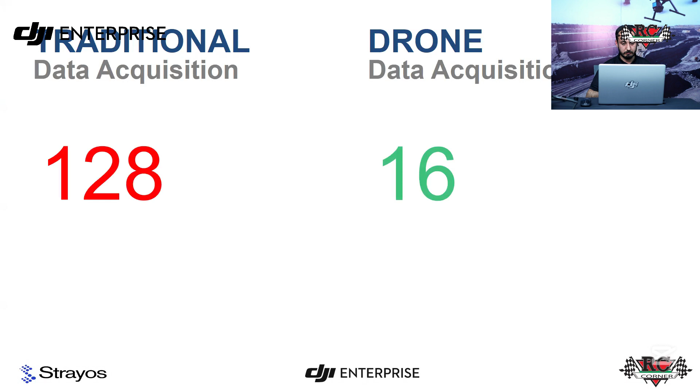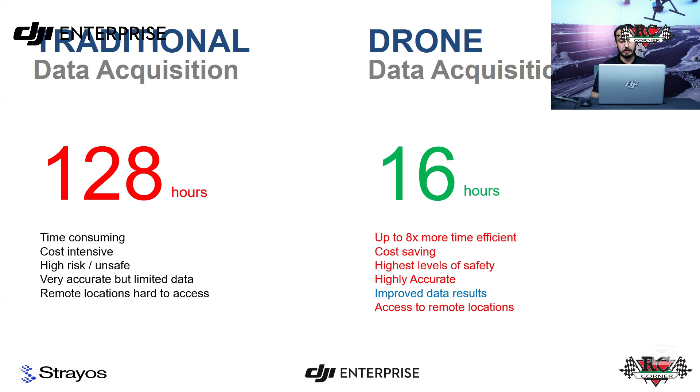As we see here, the future of work and the key benefits of switching from the traditional way to drones we have put into 4 parameters. First, it improves the efficiency of the work. How does it improve the efficiency? We can see it here. Traditionally, if we work on a construction site collecting data using a total station or DGPS devices, switching to drones will boost the efficiency by 8 times. If the traditional way takes 128 hours, with the drone the data acquisition will only take 16 hours. So efficiency increases by 8 times.

The second thing is the reduction of cost. Definitely, if the time is reduced and efficiency is enhanced, the cost will also be reduced, especially regarding timing and manpower. The third thing is enhanced safety.

Normally, if you are from the construction or mining industry, you have seen that taking a single coordinate point at the top of a hill or tough terrain is very difficult, going there with a prism rod or a total station or DGPS rover. The drone will automatically go to the site, capture the data of the whole terrain, and give you points even by centimeter, where each point is a centimeter apart from the other. It's up to you how much resolution and how much GSD, ground sampling distance, you want.

And the fourth thing is powerful insights. The powerful insight is regarding the data you get. This data is either the digital surface model, terrain model, 3D models, contours, 2D maps, orthomosaic, like that. So you can get it in a very sharp way.

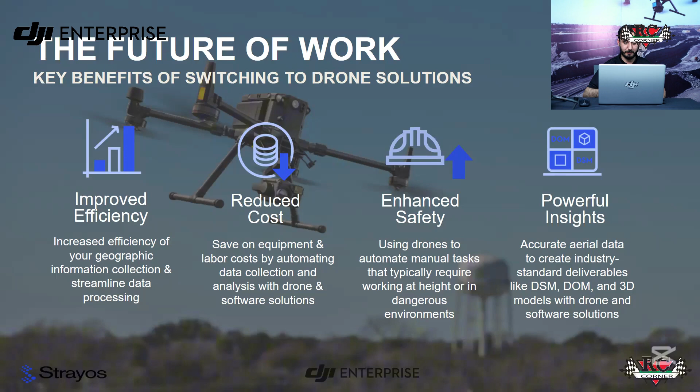So this we have discussed. The comparison of the traditional way and the drone has been explained in these 4 parameters, but another thing is the accuracy of the data. The data is much more accurate. It gives you 2 to 3 centimeter accuracy, and you can achieve more accuracy if you are using RTK processing.

Also, the data is very rich and detailed. It gives you a quick overview for planning. Whether you are designing terrains or doing urban planning, it will help you out.

What type of data can you capture and which deliverables can you make? Regarding drone photogrammetry, you can get contours and ground points, where each coordinate x, y, z will be apart from the other point by 1, 2, or 3 centimeters. This GSD, ground sampling distance, you can control. It depends on the flight parameters and the sensor you are using on the drone.

You can also generate the 2D orthomosaic map. This gives you quite good resolution compared to satellite imagery. And this imagery is geo-referenced, meaning it can be used as survey data.

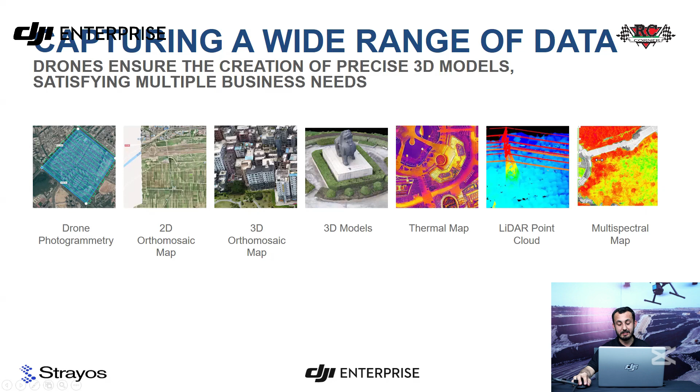This multispectral map gives you an understanding of plant indexes, like vegetation index monitoring, which plant is healthy or unhealthy, and gives you soil type data, whether this soil is compatible with this type of vegetation plantation or not. And also you can do plant counting.

So how does this start? If we go from the traditional way of mine exploration, before we were using staff rods, then we switched to total stations, then to DGPS devices, then to laser scanners, and then we switched to drones.

Because in the mining sector, specifically for open pit mines, sometimes it's a very small site and sometimes it's a very big site. So it becomes very difficult to access every step, to measure things, to measure the haul road, to do some analysis.

So this way, not only a single drone which captures imagery, but a drone with Strayos, as Strayos has integration with AI, gives you much sharper detail in a much more efficient way. Everything is cloud based. So it can save your time, it can save your cost, and it can also enhance the safety of the site.

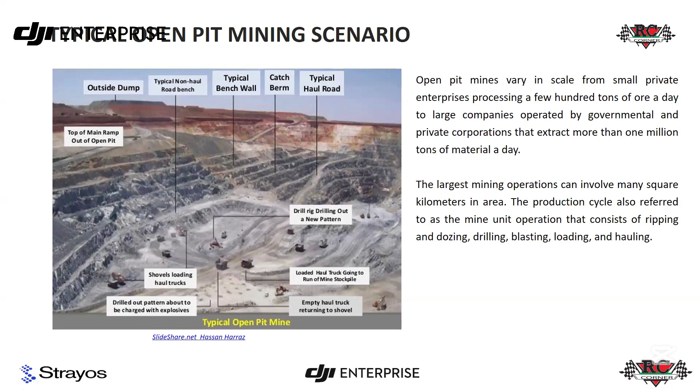So Strayos will help you do surface morphology analysis for the orthomosaic, the 3D models, the point clouds, the contours, and haul road analysis regarding the operation. It will give you haul road analysis as per industry compliance.

In different regions, different mines have different compliance, like how much slope they want, how much vertical slope, how much horizontal slope it should be. You can set it with the compliance, and it will indicate that this section is not compliant and this section is compliant. That way you can simply report it.

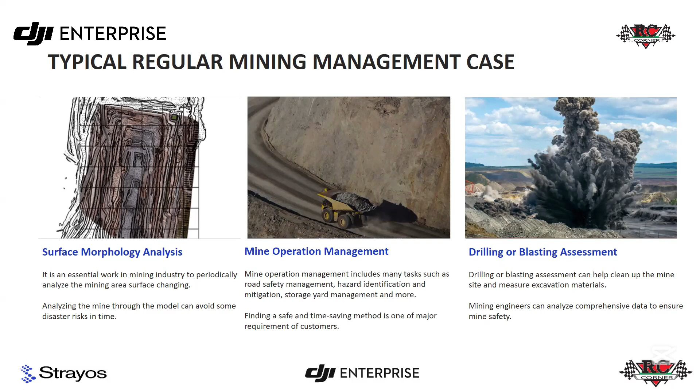And also regarding drilling and blasting, you can design the drill, do the blasting, and see the actual results. So how is the drone used in these types of applications? It gives you access to life cycle management by creating a base map for design and quick overlay, so you can analyze the as-built site and also compare it with the design overlay.

And also you can do the operational management by completely making the aerial survey and making 3D model, and also do the drill and blast analysis. And you can also do the inspection, different high wall inspection you can do, that you can also make the deep angles, each and everything you can make.

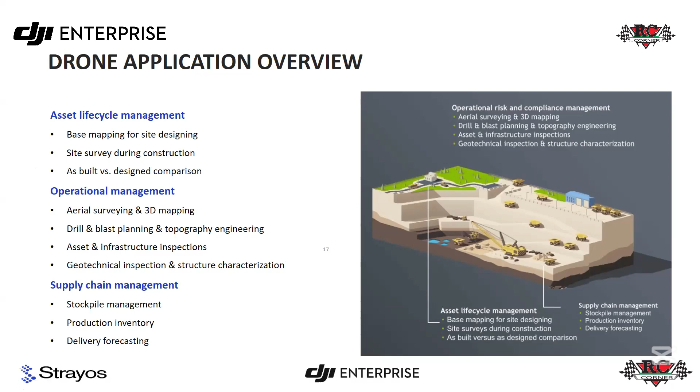Regarding the supply chain, you can measure the stockpile management. This stockpile management is very frequent in the mining operation. Yeah, you can see the inventory, how much fill and cut it is, and because of this DJI Dock 2, this will increase the frequency. Along with Strayos, efficiency is the most concerning. So DJI Dock 2 will give you daily data. It's up to you how frequently you want this data.

Yeah. So almost in every sector we have the challenges regarding the efficiency, regarding the detail, regarding the safety. So each and every factor is being mitigated by the drone. Yeah.

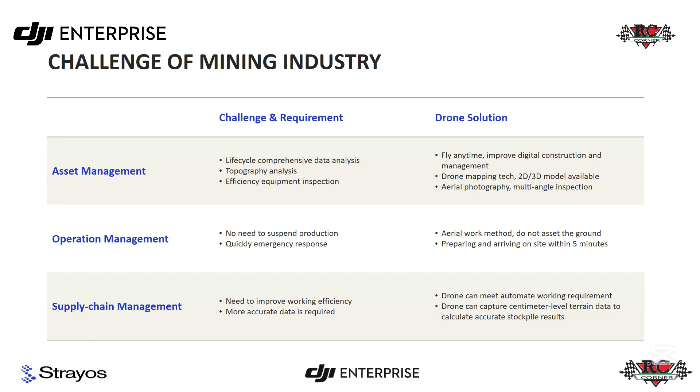So along with this, keeping all these things in mind, how does Strayos work, and which parameters and which areas does Strayos focus on? It will give you surveying and planning. The main thing is 3D photogrammetry, either it is contour, some analysis, 2D maps, a 3D model. You can see your model from the office, how it looks, where the operation is, and also you can do the geological analysis of the rocks and the high walls, and also you can design the drilling. This is the most crucial part, and you can design and measure the segments between each drill, where it should be and how much area it will cover, like how much the blasting will be.

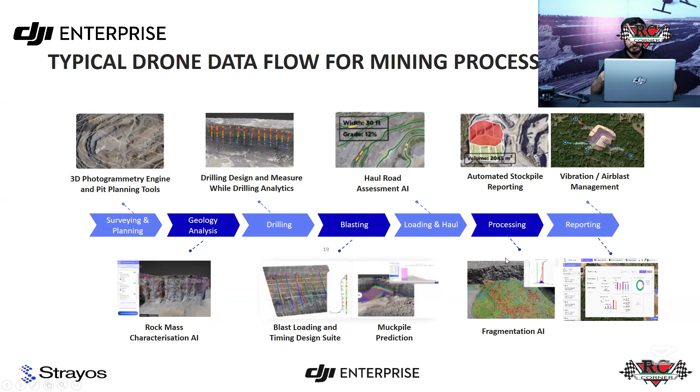And also the loading and haul road analysis. Haul road analysis is very crucial. All of this is being done by AI. Just select an option, make sure that you select a good option and that you imported the correct imagery. Leave everything to Strayos. It will do everything for you for the option you have selected. Even reporting is auto generated. Yeah. And also regarding the processing and reporting, Strayos is at the top. You can do the fragmentation analysis, muck pile prediction. Afterwards Anurag will explain this in very good detail.

So what you need to do from the start, you just select your mine pit, where your mining site is, just using Google Earth. Just select it, draw a line by creating a KMZ or KML file. Just import that KML file in your drone controller and set the parameters, specifically the side overlap and the frontal overlap. It's very necessary depending upon the topography of the mining site, and also depending upon the data you want, like the deliverables you are interested in.

Yeah, and also make some GCPs on the ground, so that you can get a very good GSD. GSD is ground sampling distance. It's like centimeter per pixel, how many centimeters is 1 pixel. So if you say that 2 centimeters is my GSD, this means that every object on the ground of 2 centimeters you can see in the map. Yeah.

So when you do everything, just fly the drone and it will collect the data, and this data you can import into Strayos. Strayos is a cloud-based platform. It does not need any high-end systems. You have an option when you open it. If you can see my cursor, you will have just 3 options here, like you can upload the JPEG images, which are georeferenced, having metadata at the back end.

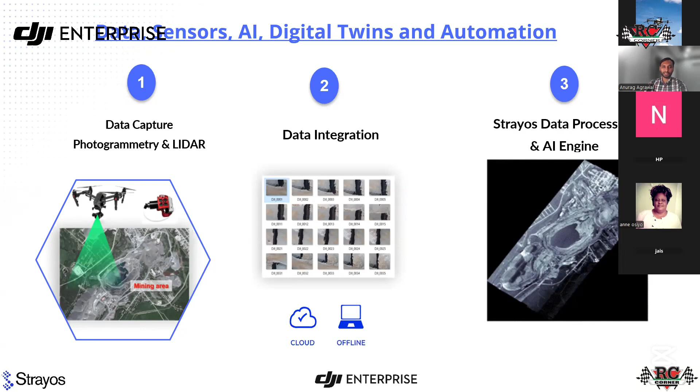So let's first start with the data management and survey tools. Currently we are facing many difficulties in the analysis of our data. So what you can do, you can easily capture your data through the drone in a photogrammetric or lidar survey, and you can easily integrate your data into the Strayos software by uploading the raw images or geotagged images, and there 60 plus AI simultaneously work in your data processing as well as in all the AI modules running. You can easily integrate your data through cloud or offline.

Generally, we are facing many difficulties in the mine regarding flight planning. How should we do flight planning? At what altitude should we fly? Should it be a double grid or single grid pattern? We generally recommend our users that the overlap between images should be a minimum of 70 to 80%. GSD should be less than 2 centimeters so that you get proper and clear images.

If possible, try to maintain the same flight path to maintain consistency, minimize the error, and maximize your ground control points. Many users ask me how many ground control points there should be for this many hectares of area. I always recommend a minimum of 5 GCPs. If you maximize the GCPs, you will get more accuracy.

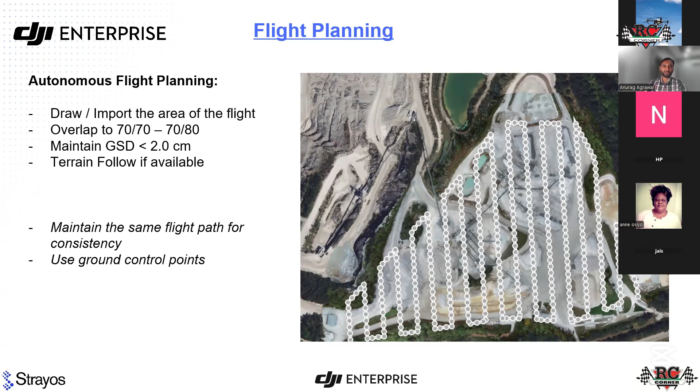Now the next question is, where should I install my GCP points? I always recommend GCP points should be installed where you are getting elevation difference. If you are getting multiple elevation differences, there you should install GCPs. Also, try to make a triangular geometry.

Someone asked me about GCP-related drones, but another asked me: I have a PPK and RTK based drone, so should I also use GCPs with this PPK and RTK? I always recommend that initially you should use GCP points with this model. Later on, you can remove them.

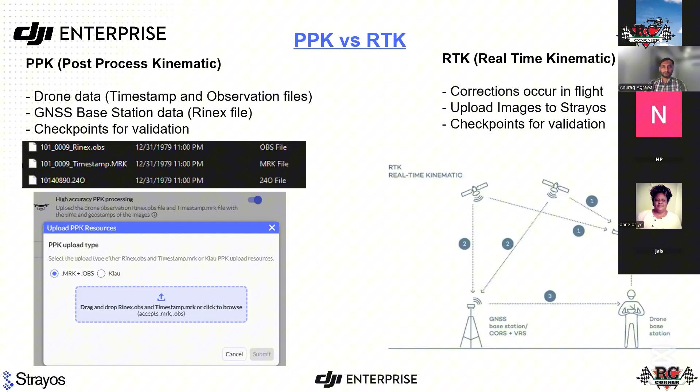In the PPK model, you have to import the timestamp and observation file for the drone data, as well as the RINEX file, which is the base station data. After importing all the data, you can validate with your GCP points. By using this model, you will definitely maximize your accuracy and minimize your error. Also, RTK models you can directly import into the Strayos software and validate with the managed checkpoints.

After uploading all the data to the PPK or RTK based model, the software takes 1 hour for 250 to 300 flight images. It also depends on how many AI you have toggled on for processing. After that, you will get a proper orthophoto and bench face model in 2D and 3D view, where you can easily analyze your haul road, gradient, and bench face angle. In a single orthophoto image, you can use any AI module: haul road, high wall, cut and fill, drilling, blasting, stockpile.

So let's start with a video here on how you can easily create a new project. This is the landing page of our software, and I have clicked on new project. After that, there are three options: upload JPEG images, pre-processed data, and virtual data. In JPEG images, you just need to write your site name and location details. Then you can write your lat-long details, or directly import a single image so the software automatically detects the location of your mine or site.

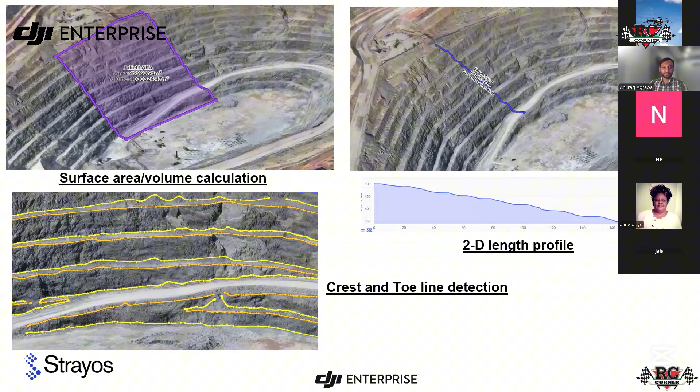Now let's move to our next topic, which is the stockpile AI and inventory management. Before moving on to stockpile, it is the same process I told you earlier: again, you have to take your data with the drone, either in a PPK or RTK based model, and then you have to toggle on your stockpile AI.

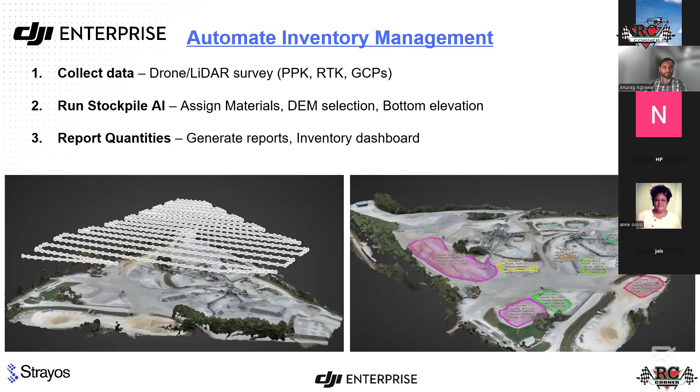After that, it will give you a report in the form of the quantity in the inventory dashboard. So for that, here you will find the stockpile AI module. You just need to toggle it on while uploading your data, so that uploading, processing, and the AI analysis all work at the same time. No further time is required for the AI analysis. So that's why we recommend to toggle on stockpile AI from here only.

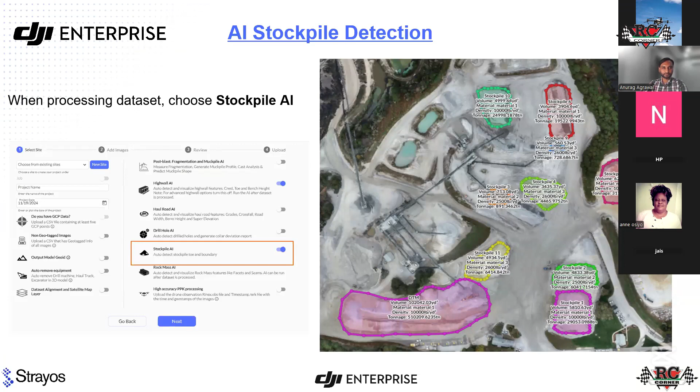Now let me show you in the form of a video how you can easily analyze your stockpile. So like you can see, this is stockpile measurement. Here you will find create, copy, delete, and boundaries. So create: if AI has not detected any boundary, that facility is available manually. We can mark the boundary around the stockpile. Or if you want to copy from other projects, that facility is also available. We can delete, or we can also import the DXF boundary details.

Let's say the software has detected it, but due to the uneven base surface, it may not select the proper elevation details. So in that case, if you want to import your DXF file having the proper altitude details, you can also upload it here. Other than that, let me highlight. Yeah, you can copy from here. You can also import the boundary. You can manually edit your boundary also. And yeah, this one I want to highlight.

There is a model and bottom selection. Model means the DSM model as well as the DTM model. So it depends on how you have taken all the data. Based on that, you can select any one of these two models. And for bottom selection, we have 6 different bottom selection methods. So you can select any one of these methods for the analysis of your stockpile.

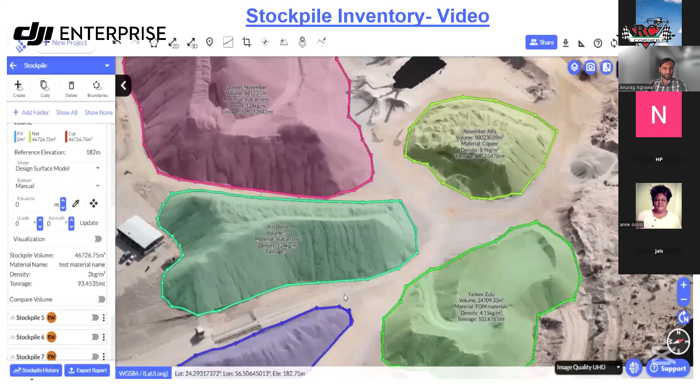After completion of this part, you will find the inventory dashboard, where you can see the inventory details of all the materials. You can add your material details here: the SKU of the material, name, product code, description, density, price per metric ton, and the currency of your material. All details need to be entered here.

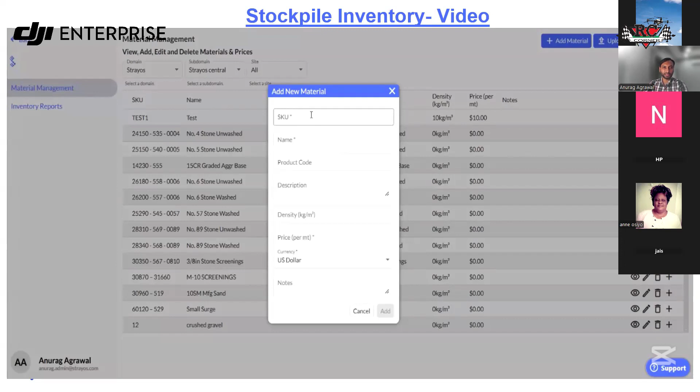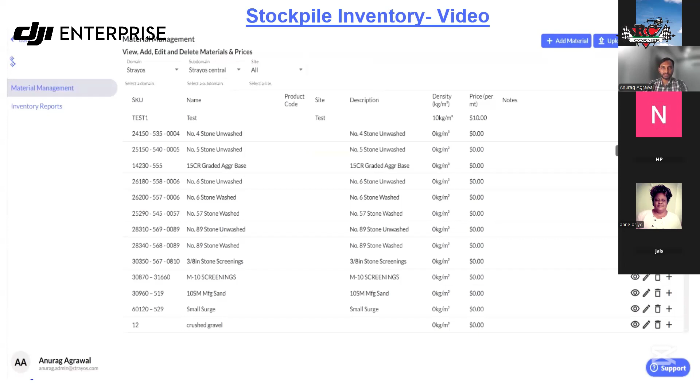After that, you can see all the details of your domain and subdomains, and after selecting any particular project, you can see how much stockpile volume is available at a particular site. Inventory report in the form of different graphs. Let me show you. Yeah, you can see total volume per site. As per your given material details, it shows this particular material having 2%, this one 1%, 0.2%, 4.6%. So after giving the material details, you will find all the quantity details of the material here.

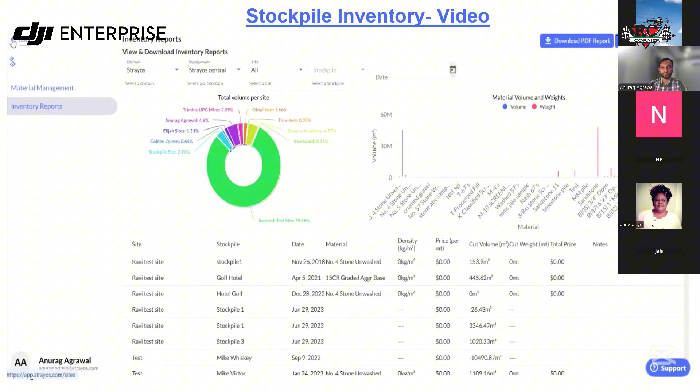From here also, you can easily visualize in tabular format. And date-wise, you can select from this date to this date, how much quantity of material has been added or removed. After that, you can download it in PDF format as well as CSV report format. So yeah, this was all about the stockpile inventory video details.

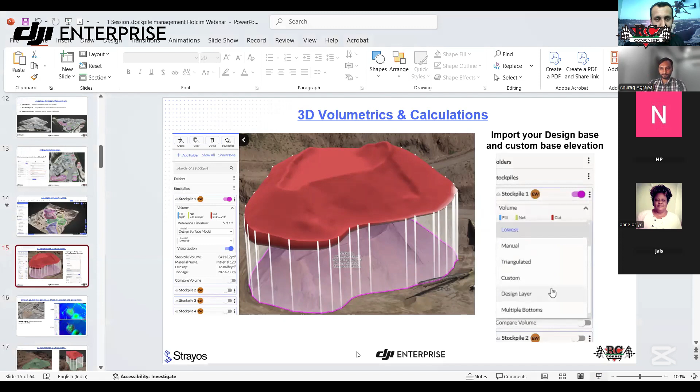So the poll we executed is about significant challenges you experience when using UAVs for stockpile inventories. The most common answer, 36%, was technical complexity regarding the data processing. So this is the only platform that will help you with data processing, analyzing, designing, and reporting. Everything under one platform, Strayos has. Yeah, you can continue. Yeah, correct.

So in a single platform, you will get all the analysis. You can easily import your raw data, and the rest of the work will be done by the Strayos software. No integration of other platforms is required. And as I said, there are things you have to maintain while taking the drone imagery data. If you maintain that, everything else will be taken care of by the Strayos software. You just need to follow the flight height, your percentage of overlapping and your GSD. Then Strayos will work.

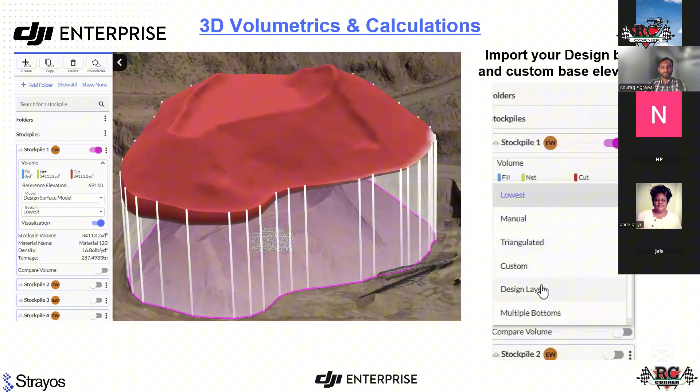As I discussed about stockpile analysis, what you have to take care of is the model selection and the bottom selection, which are very important. In model selection, sometimes we have taken data where plants, trees, or the conveyor belt were present. In that case it was very difficult to analyze the volume, because it was considering that as an elevation difference in the volume calculation. In that case, you have to select the DTM, not the DSM.

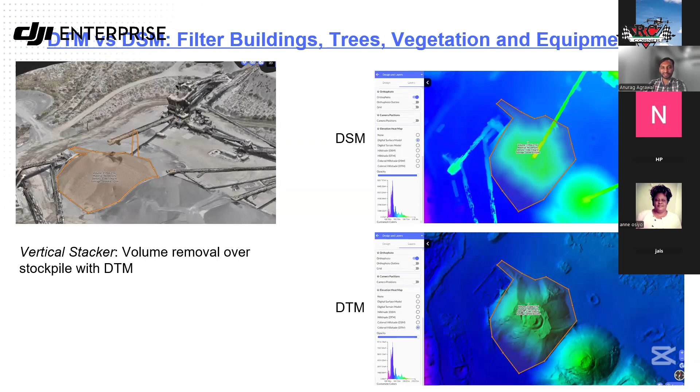That facility is also available, and as I said, there are 5 methods available for the bottom selection. If you select average, the software considers each elevation, determines the average of all the elevations, and based on that determines the volume. Linear fit: the software considers the angled plane that comes as close as possible where the corner points are available. Wherever the corner points are, it changes the elevation, then takes the average of all the corner point elevations and determines the volume.

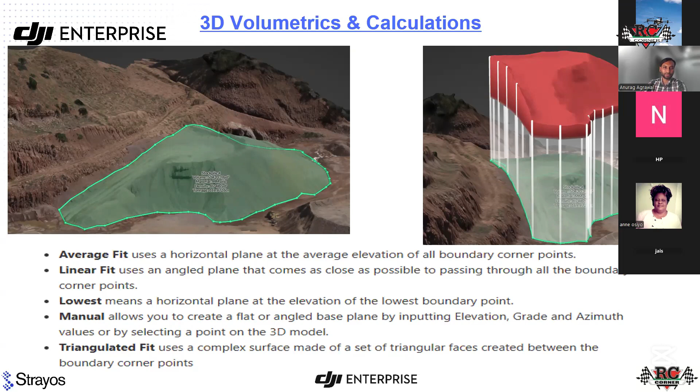Lowest: whichever elevation is the lowest, it considers in the volume calculation. Or manually, you can input your elevation. Or triangulated fit, which means the area is converted into a number of triangles, so there is a triangle area, triangle volume, and accordingly it calculates the volume of the material. So there are many methods available, and you can choose any one of these for your analysis.

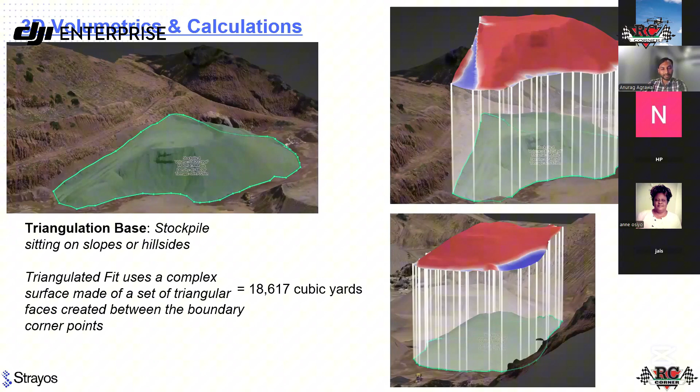So similarly, one case study: in a single area, I used the triangulation base for the stockpile analysis, where I found 18,617 cubic yards. Again, when I used another base, a linear base, the result was 24,636. You can see here, a huge difference just from selecting two different bottom elevations.

You can see how the stockpile is designed here. Many differences of elevation are present here. So in that case, it is very difficult to calculate the accurate volume of the material. So that should be taken care of while determining the volume of the material.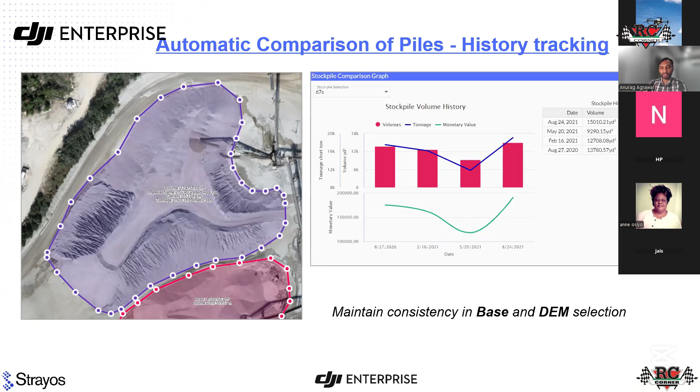So after having all the volume details, you can see the volume history of the material in this graph. You can see how, date-wise, the volume of the material is changing, as well as tonnage and pricing. So on 24th August the pricing was different, and on 20th May the pricing was different. You can see it all in a single platform. You can download it in PDF format.

Also, we have the facility to analyze multi-layered volume. Let's say in a single area there are 2-3 bottom elevation differences. You can select any one of these elevations. So I selected layer 1, and it calculated the volume. In layer 2, the bottom was different, and it calculated a different volume. So there are multiple layers on the boundary you can select to calculate your volume of the material.

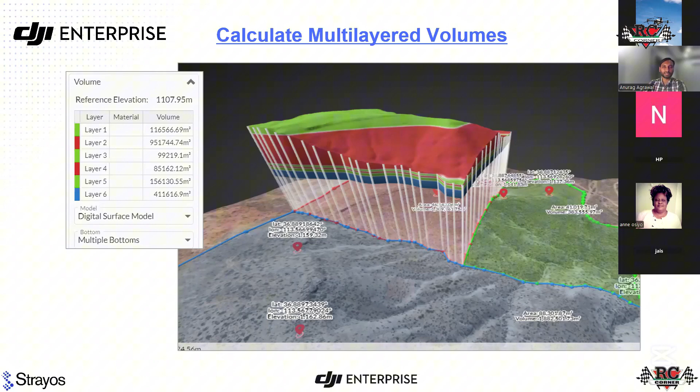So after having all this data, you can transfer it to the PDF report. You can visualize it in a centralized inventory dashboard, in different graphs, date-wise and material-wise, how it is changing. And you can easily export your stockpile details to your SAP through API integration. So that facility is also available. So you can easily manage your volume details in the software as well as in the SAP platform.

So after that, let's talk about cut and fill quantity analysis. Why should we use cut and fill quantity analysis, and why is it very easy in the Strayos platform? Generally, currently we are using huge manpower, a number of instruments and devices, or spending 2-3 days just to calculate how much material has been removed from a particular area. But here, using drone imagery, you just import it into the software, and it will tell you how much material has been added or removed in a particular area within a fraction of a minute.

Why is it very necessary in the mine? Because with proper cut and fill volumetric details, you can smartly allocate your equipment, and it can be used to monitor excavation progress or demonstrate compliance to design limits. In limestone, iron or manganese mines, somewhere we find low grade ore, somewhere high grade ore. We know what percentage should be mixed. So we should know how much material to remove from the low grade and from the high grade between given dates. So cut and fill is very important.

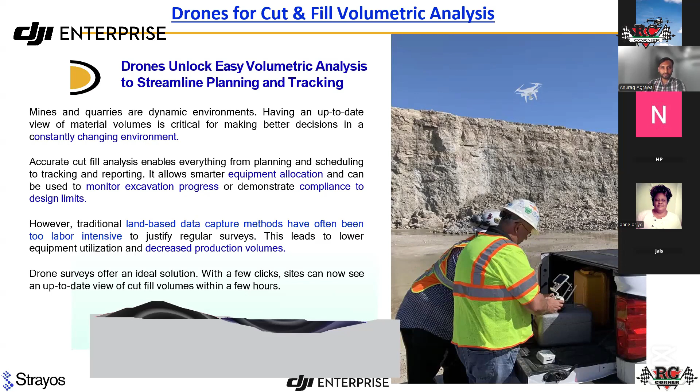Similarly, for overburden in a coal mine, how much overburden has been removed in the last 1 or 2 months we can easily determine without many instruments or manpower. So let's see the video of this cut and fill analysis. I've selected the model and data set here, and I'm comparing it with another data set. We also have the facility to select the design layer, the DXF data. So you can compare with your own data set or the design layers.

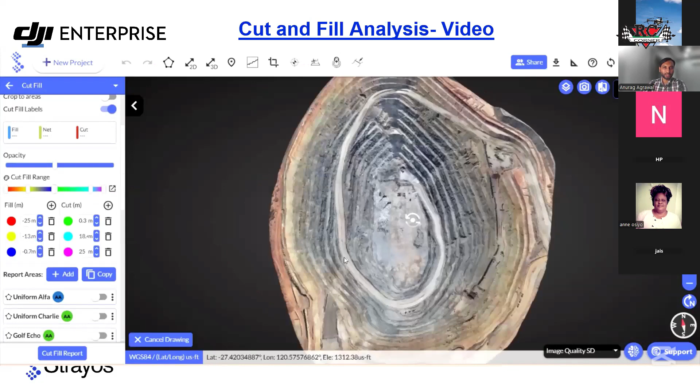After that, you select which project you want to compare with the current project. And this is the elevation and contour difference. After that, I only have to select the area where I want to analyze how much material has been removed or added in this particular place. Just after selection, you just need to wait for 2-3 minutes.

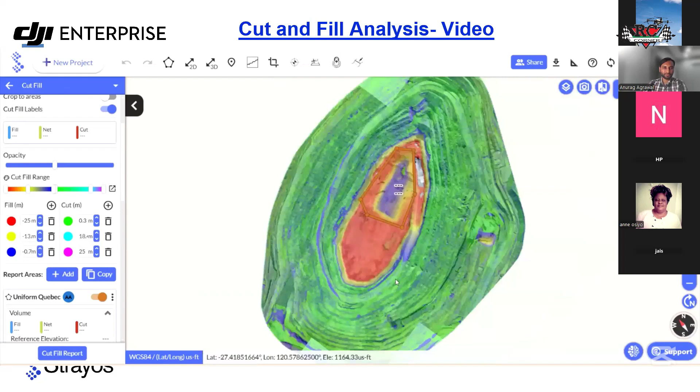After that, it will give you the data. Now you can see here it shows 430 cubic meter and 4,65,900 something cubic meter, which is in minus. So here you can see fill quantity is minus and cut quantity is this one. So it means that this much quantity of material has been added at this particular place, and this much quantity of material has been removed from a particular place.

So like that, just by marking the boundary of the area, you can easily analyze what is the cut and fill quantity of the material. So like you can see here, this is the single image I use for the cut and fill quantity, I use for the haul road analysis, I use for the high wall analysis, and after that I can also use it for the drilling and blasting. So in a single image, you can use it for multiple purposes.

So here you can see the reference elevation. Automatically the software takes the reference elevation. Then after that you can easily export your data in CSV format, DXF format, GeoJSON format, KML format, or SHP format. Then you can generate a simple cut and fill report. You will find in the report how much quantity of material has been added or removed from this particular phase, cut and fill volume. So all these things you will get.

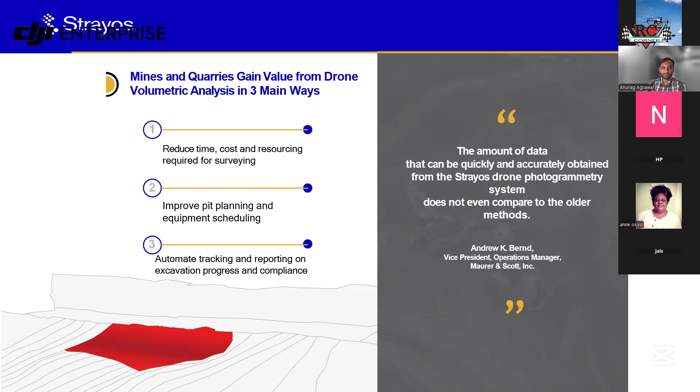So why is it very important? It reduces time, cost, resource requirement for surveying, as well as improves pit planning and equipment scheduling. After having the accurate data of your cut and fill quantity, you can move your equipment to the required place. From this location, enough material has already been removed, so no further equipment is required, so now you can move to the next location. So proper scheduling of your equipment can be done, as well as automatic tracking and reporting of excavation progress and compliance. You can easily visualize all the excavation progress in this platform.

So how does it reduce cost, time, and resource requirement for survey? Because in the last 5 years, we have seen that the industry has undergone a transformation. Every day we need data on how much material has been removed today, how much material has been lifted today, or if any third party is working in our mine, what they are doing, how much material they are removing daily. All these are necessary for our analysis and for what cost we are paying them. So we need all this data; it is very necessary.

As well as we can improve pit planning and equipment scheduling. As I said, you can easily improve. You can do multiple cross sections of your pit and visualize how the difference has happened in a particular place and how much material has been removed.

After many case studies, we have seen that approximately 5% production rate has improved after having the cut and fill data. As well as utilization has increased up to 10% and forecast accuracy has improved by 50%. Because if we have the accurate result today, then for the next month or the next quarter, we can plan that we have to remove this much quantity of material. If we don't have any data, what can we do for the next quarter? That's why this data is required, which we can easily get by using this technology in a single day or within a gap of 5 hours.

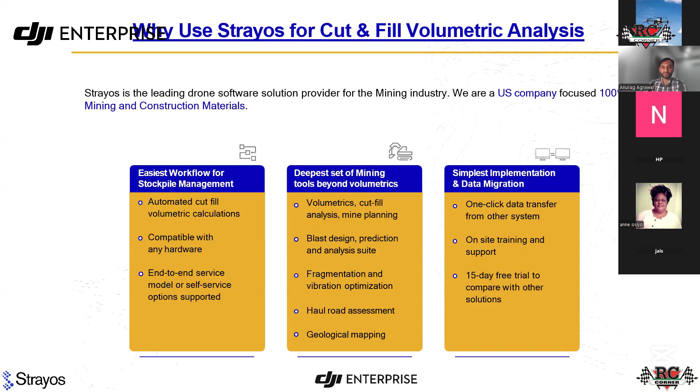A set of mining tools beyond volumetric, because in this single platform, you will get all the other tools, not only a cut and fill volume analysis, but also the haul road, high wall, stockpile, drilling and blasting, and geometric compliances also, like the stability of slope factor, rock mass analysis. All tools are also available. So if we are getting all these tools in a single platform, why would I not use it in our cut and fill analysis?

So after having the cut and fill analysis data, you can further do the site analytics and the safety and efficiency of your mine. Here we'll discuss the haul road analysis, high wall analysis, and slope of your benches to maintain the safety of your mine. So let's start with a small video first, then we'll deep dive more into it.

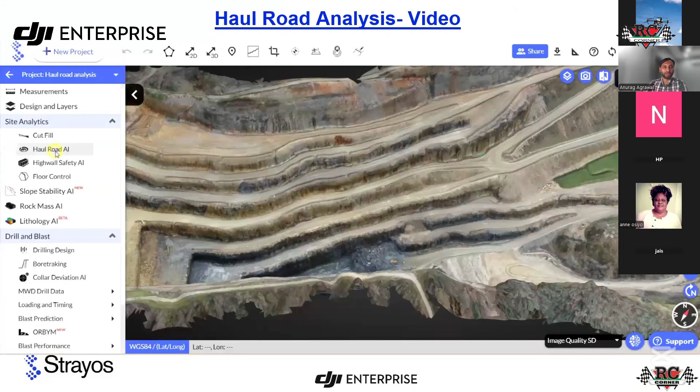So you can see I just toggled on the haul road AI here. Nothing I did here. After importing the data, I toggled on the haul road AI. Then I toggled on the road grade, and I can visualize it in different colors. And you can see, this is the tolerance limit. You can edit your tolerance limit, and based on that, you will find the different colors on the road.

You can simultaneously see length, grade, ratio, inclination, and width of your haul road just after clicking anywhere, as well as the crossfall. Crossfall is required to maintain rainy season water drainage, because you definitely don't want to keep water on the haul road. You want to move it to the lower pit of the mine. So you can easily analyze the side gradient of your haul road. The crossfall is very important.

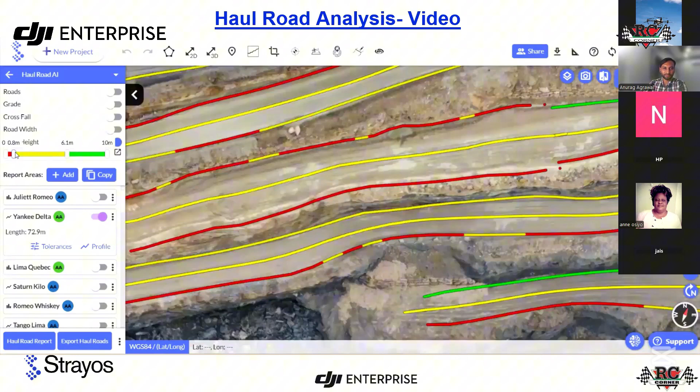As well as the road width, what is the width of your haul road? According to a tolerance limit, you can visualize it in different colors, as well as the bench height and berm height. So what is the berm height? You can see the safety berm height. So all this can be easily done by toggling on the haul road analysis.

So why is haul road analysis required? Because haul road AI analysis software automatically analyzes the haul road conditions; we didn't do anything manually. Everything has been done by the software. We just need to import images, to improve machinery efficiency, productivity, and safety. Extract the geometry of the haul road using the geospatial data contained in the modern drone survey.

Road boundaries, crest, and other properties of interest can be displayed and examined in the Strayos web-based interface, and the change in length, slope, and elevation can be measured as well, because we have guidelines from our government that we have to maintain 1 in 16 or up to 8 degrees for the haul road where the dumper is moving. If we don't maintain it, the government imposes fines on us. So we have to maintain the mining compliances, and for that, daily, weekly or monthly measurement is required.

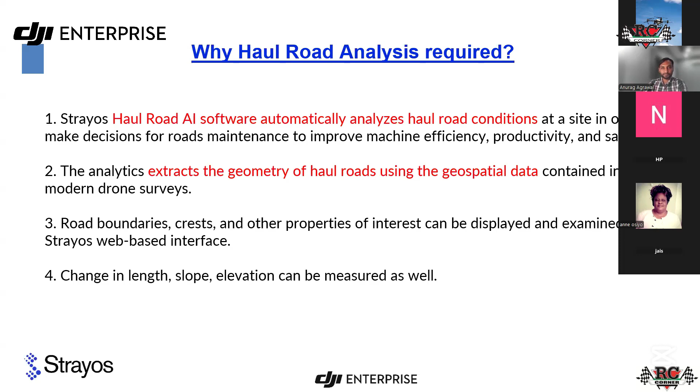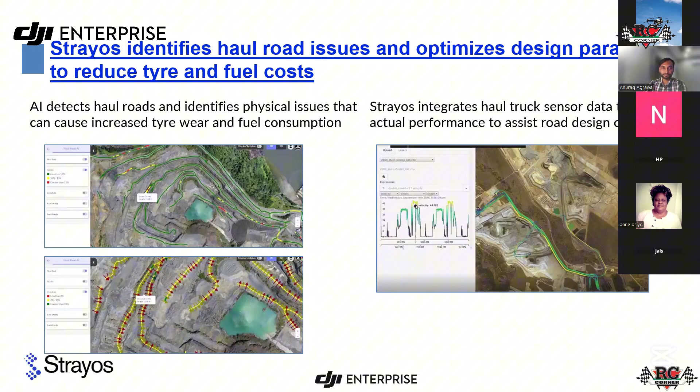Not only for mining compliances, but also to analyze where you are losing fuel. Because if the gradient is high, you will definitely lose fuel from your dumper, and we are also taking the tire pressure as well as fuel sensor data. There we analyze where we are losing the maximum fuel while running from the pit to the dumping location. So automatic pit inspection, road grade, super elevation, and bumps can be easily done.

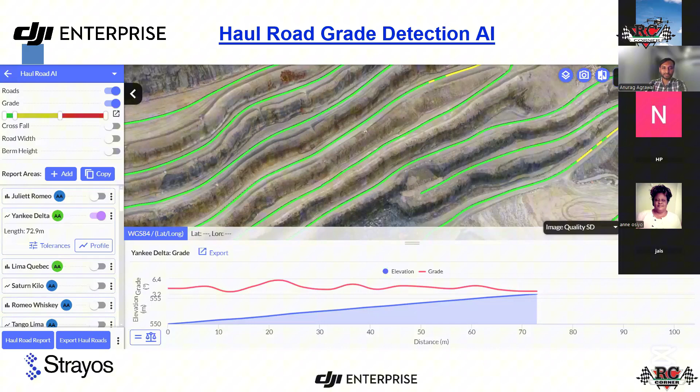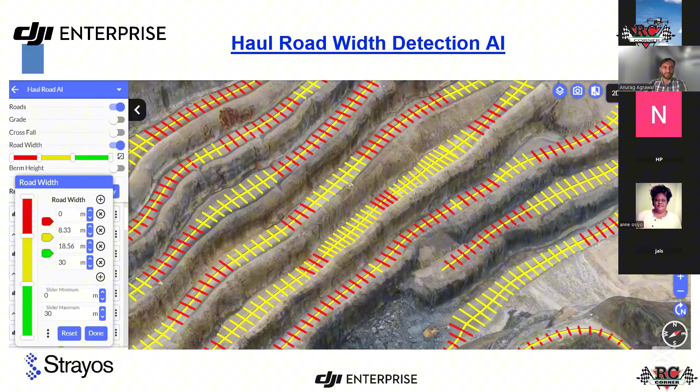Haul road grade detection AI: you can see I can do multiple cross sections around these benches and easily visualize how the elevation is changing, and how much undulation is in the haul road. Haul road width detection: just after toggling on, you can see the haul road width detection, and these are the haul road ranges. You can change your ranges, and you will find different colors. Similarly, haul road bump detection and crossfall detection, you can see.

So after that, let's start one poll here related to haul road. Do we have one poll? Yeah, we have one poll. So if you can quickly go through these things, we are, I think, running out of time. Yeah. Okay. It's a poll.

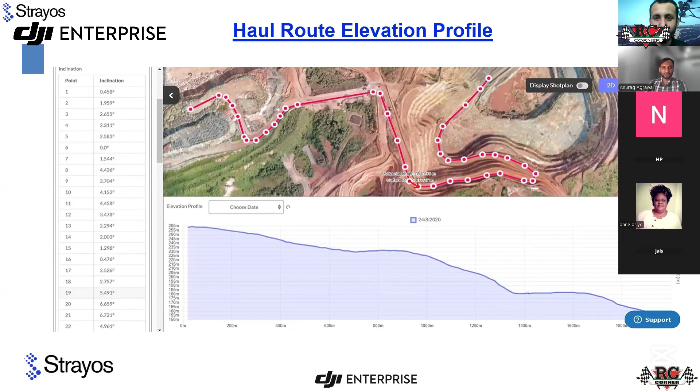How frequently do you conduct comprehensive haul road analysis in your mining operation? So maybe some of you are not conducting it, or conducting it annually, quarterly or monthly, or on a weekly basis, or sometimes daily operation? So yeah, we are receiving some of the answers: some people are conducting on a weekly basis and some are conducting on an annual basis also. Yeah.

Yeah, for this we have the DJI Dock 2 solution. So just install this on site. All the data is being synced to the cloud platform and is being integrated with Strayos. You just need to sit in the office and do the management of the organization.

The drone will fly automatically at the specific time which you assigned, and it will collect the site data and will come back to the dock station, and all the data is being synced to the cloud platform which is integrated with Strayos and will give you this result. So this way you can enhance the frequency of the operation.

Yeah. So, almost we received from some people. It's like 50-50. Some people do it on a weekly basis, some of them on a monthly basis, and some of them on an annual basis, depending upon their site. Yeah, Anurag, you can continue.

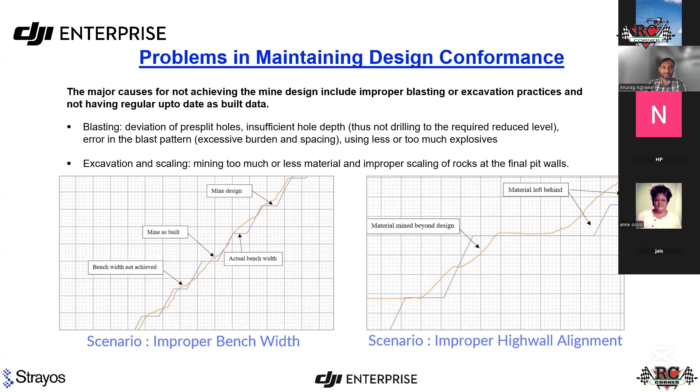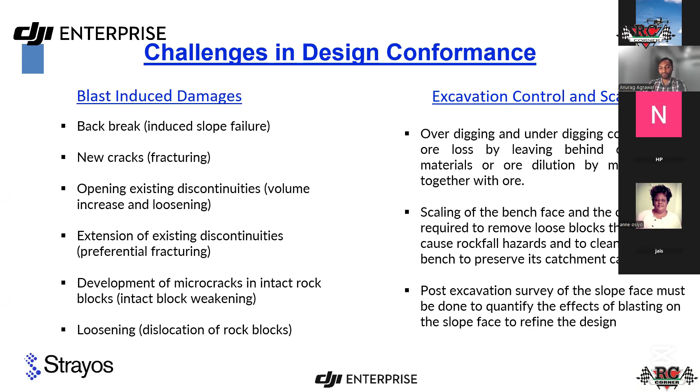And also overbreak and underbreak could result in ore loss by leaving behind ore bearing material, or dilution by mining waste together with ore. So these are the challenges we are currently facing while designing the slope of your benches. Also, post excavation issues.

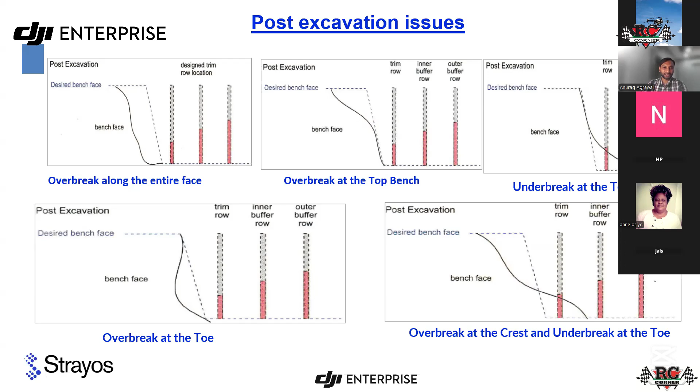So let's see in the video how you can easily analyze and see your high wall bench. You just need to toggle on your high wall, and then you can see the catch bench width of your high wall, bench face angle, bench height, crest and toe.

Also, we have features like compliance check. So you can compare with your DXF design. In that case, you can upload your DXF, and with the orthophoto image, you can compare what is current and how we are going in the mines, whether we are following all the mining compliances or not. So where we are losing, where the angle of high wall bench has increased, all you can see and compare here.

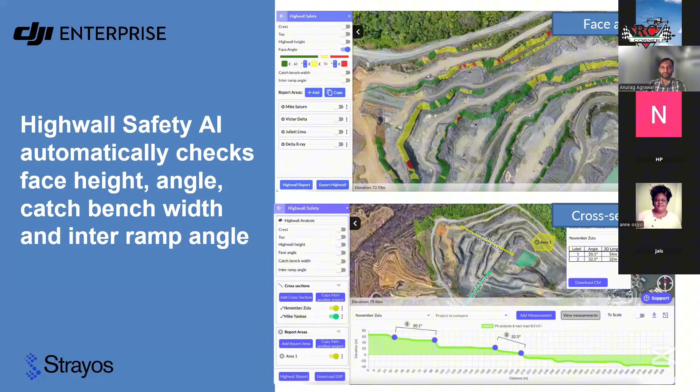This is the face angle. So you can see face angle, cross section view. You can convert your benches into different cross sections, and for each cross section, face angle, catch bench width, high wall angle, anything you can see here after dividing into multiple cross sections. Like see, face angle, face side, inter ramp angle, catch bench width.

If I see the mine from top view, you can see it shows the length, surface length in three different sides. When I see this top view in side view, you can see how the angle is changing from top to bottom. So easily you can determine how the angle is changing, and accordingly you can judge whether you are maintaining the proper factor of safety of your bench or not.

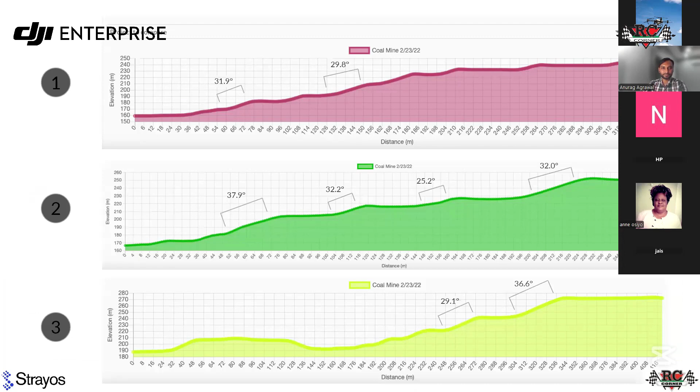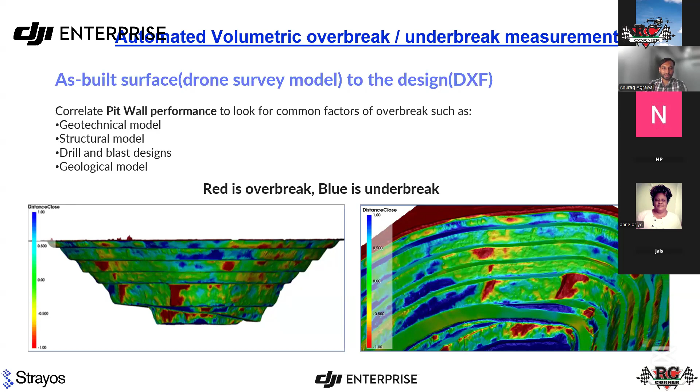And after comparisons, you can see it shows red in over break and blue in under break. So we just imported the DXF data and compared with the orthophoto imagery data, and from this we can see that red location shows the over break and blue shows the under break. So in this way, you can import your DXF data, upload a managed design DXF, overlay it on your orthophoto imagery data, and simultaneously see and do comparison, and do many further works after having the DXF data.

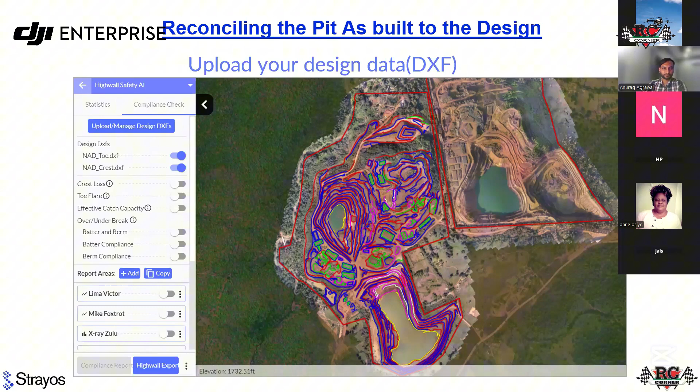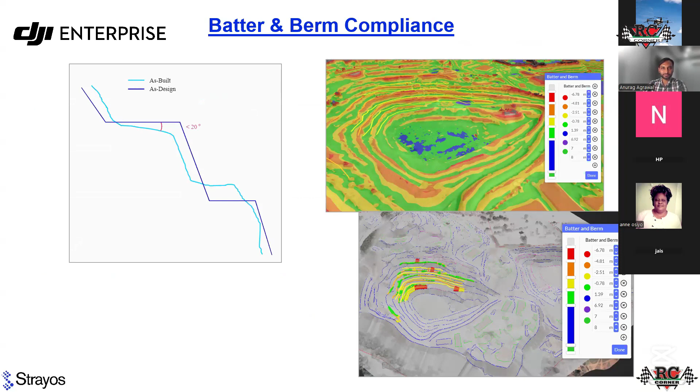Automatic reconciliation, crest and toe loss, effective catch capacity, batter and berm compliances. So after uploading your DXF data, all the compliances you can follow by visualizing in different colors. You can see batter and berm, meaning over break and under break. You can fix your ranges with different colors, and simultaneously you can analyze. And after that, you can generate your report, which is fully automated,

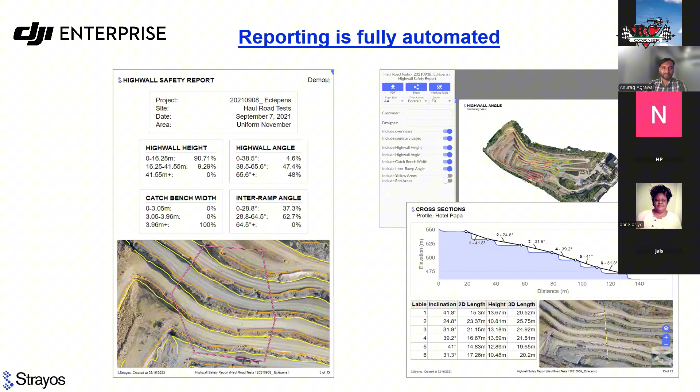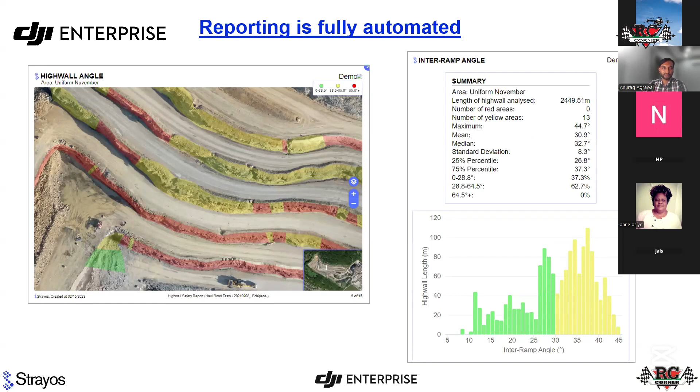where you will find the project details, site details, high wall height depth-wise and length-wise, angle, inter ramp angle, and catch bench width. Fully automated summary details here. This is the length of high wall, number of red areas, number of yellow areas, how much percentile, standard deviation. So all these details you will get. And at last, up-to-date high wall and pit compliances. If you maintain the pit compliances, you will improve your mine design and mine technique to minimize the ore loss, and you will avoid pit stability issues.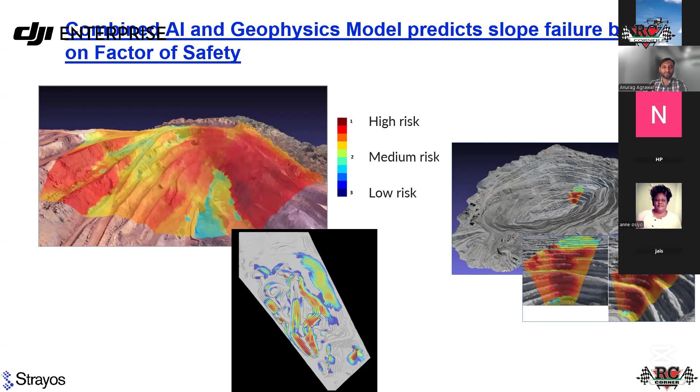So at last, I want to tell you the advantages of having the software. Any type of file, such as drone images, LAS files, DXF files, or pre-processed files, can be imported. No other software integration is required, but data can be easily transferred to other software. A subscription model is available, which allows use on any hardware at any place. So you just need to run it anywhere on any hardware. No particular desktop or laptop is required.

All modules and tools are available in a single platform so that data analysis can be done easily. A single orthophoto image can be used for every type of analysis, whether for mining compliances, geotechnical compliances, stockpile analysis, or drilling and blasting. So these are the advantages of the software.